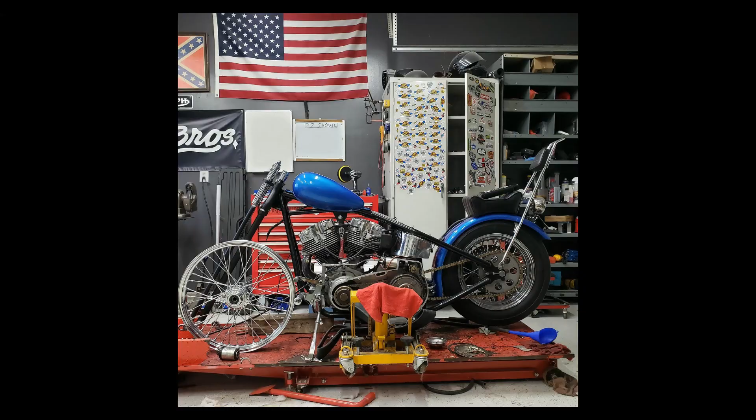Today we're going to go over how to change the oil in 39mm fork tubes. But we're also going to change these tubes out to 4" over, since this is going to go on our Sportster project. So what we're going to do is a combination. I have a tech manual, it's sitting over there under some stuff, but this TC Brothers 4" over kit also comes with instructions. So let's go through their instructions and we'll see how that works out.

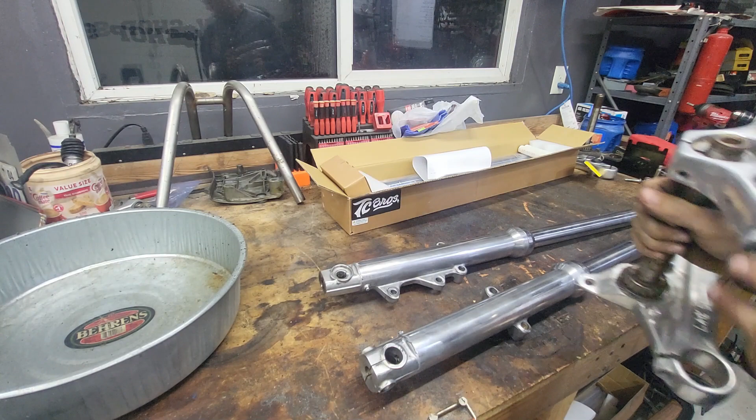Let's see, this is your triple tree. This is where your forks go. The way you get your forks out is you loosen these two clamps right here and they pull out the bottom. Now a lot of this stuff you can do with your triple tree in place on the bike, but given the condition of what we're working with, everything had to come off of the frame so we could make magic happen. Okay, so let's see what these instructions say.

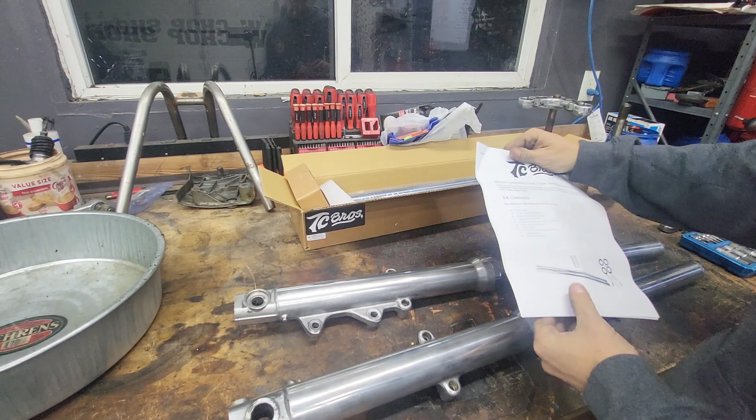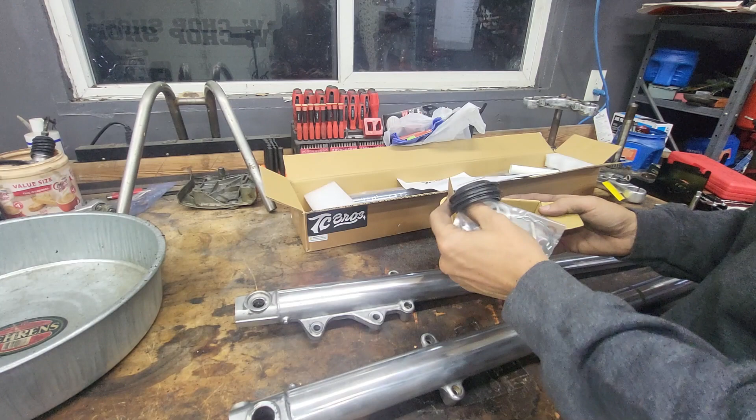Kit contents: 2 fork legs, check. Spacers, check. And seals, rod seals, seals, and seals. Checkity, check, check. Okay.

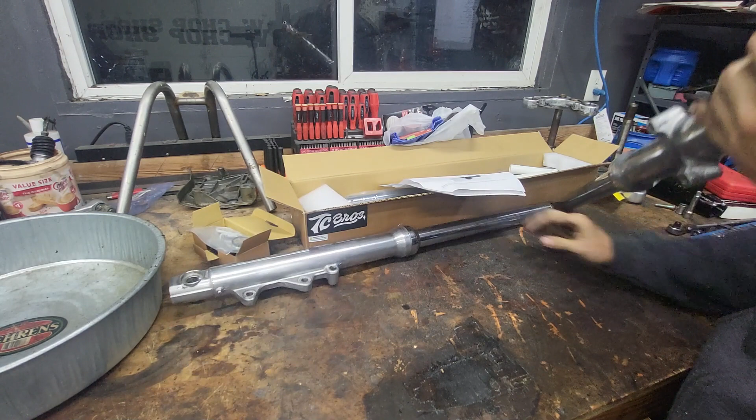Step 1, use an extended 6mm hex bit to loosen the damper bolts. If the damper bolts just rotate, use an impact tool. Okay, so those bolts that they're talking about are right there. And that's a 6mm. I don't think I have an extended one. I have a 1/4" one. Let me get an extension. Let's see if this will fit. Yeah, it fit right in there. All right.

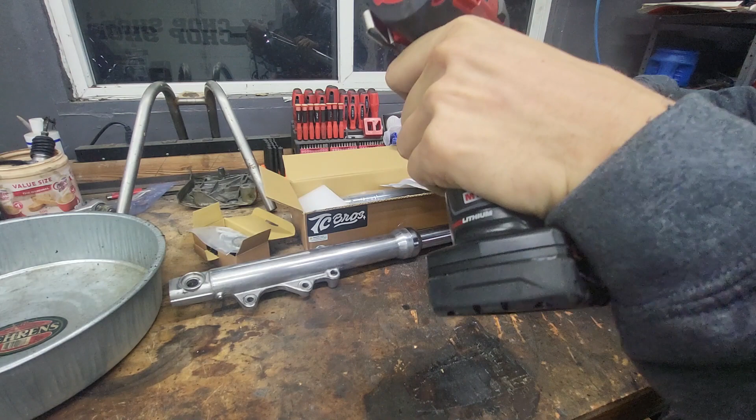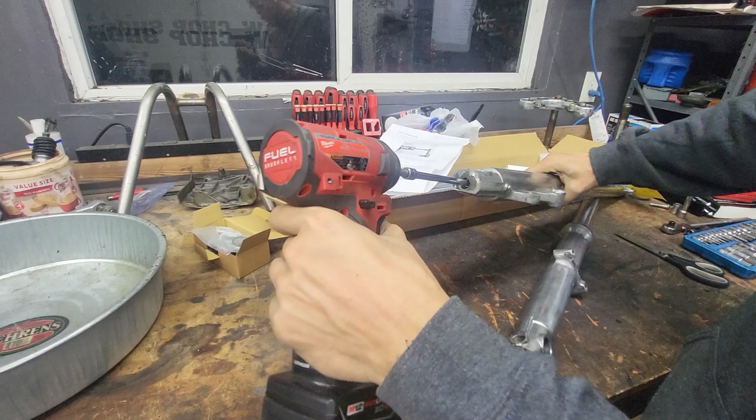And it said an impact will usually loosen them up. So, impact. Yep, that loosened right up. Does it say remove or loosen? Loosen. Okay. So those are loosened.

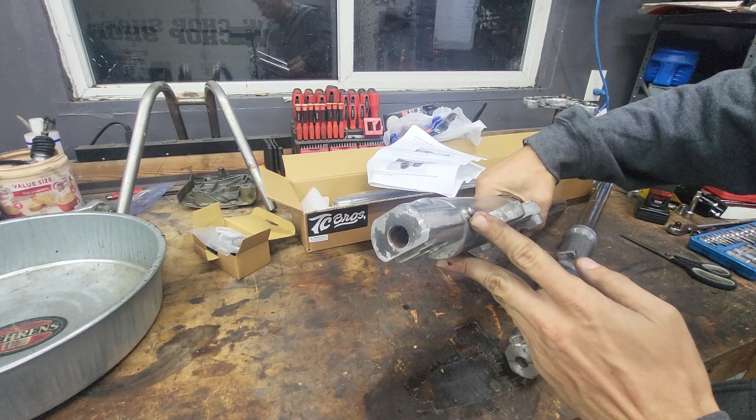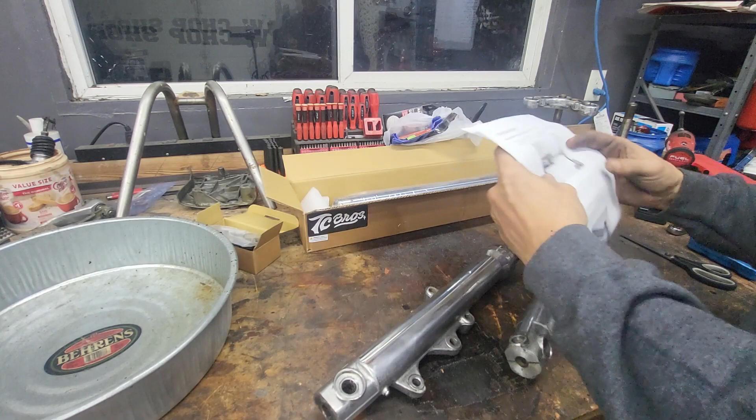Don't disturb the drain screws. All right, so this is kind of common. These little tiny screws on the side are your drain screws if you were going to do a fork fluid change in place, right? So when we pull the damper screw out, we're going to be able to flush the fluid out. Also, have a pan ready for that. But if these don't leak, just leave them alone. They're hell to get in, get out, and have stop leaking. They do include new drain seals if yours are leaking.

Let's see, loosen the fork caps. 35mm socket to loosen the fork caps. Let me get these set up. So here we go, that's your fork cap. That tool I need to grab. All right, so this is a 35mm. The easiest way to do it is a 35mm socket. Also, your fork is extended down, right? So you can lean over this, put some pressure on it. It doesn't pop with a lot of force. This is not like your car's coilover system. Sometimes I need to use my big wrench on this, see if this goes. Yeah, that's working.

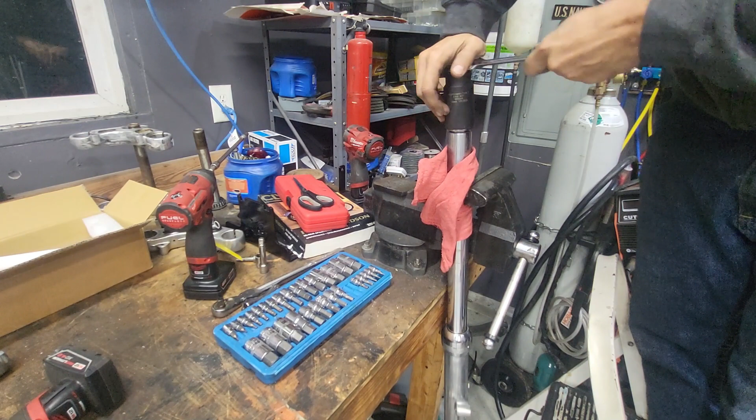Okay, now I like to get on a little step stool just so I can lean over this, and I'm leaking. So throw a pan down here. This is actually way easier to do in the triple tree. But like I said, it's not gonna blow my arm off. It's gonna be a bonk, and then the cap's probably gonna fall. So that's it. There we go. See, that's all.

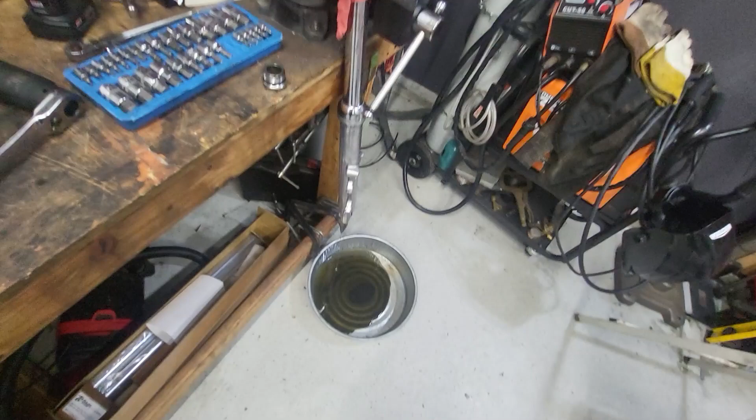Putting them back in sucks. Oh, that is what it is. Yeah, there's where it's leaking a little bit. All right. So we'll let that one drain and we'll get lined up to do the next one.

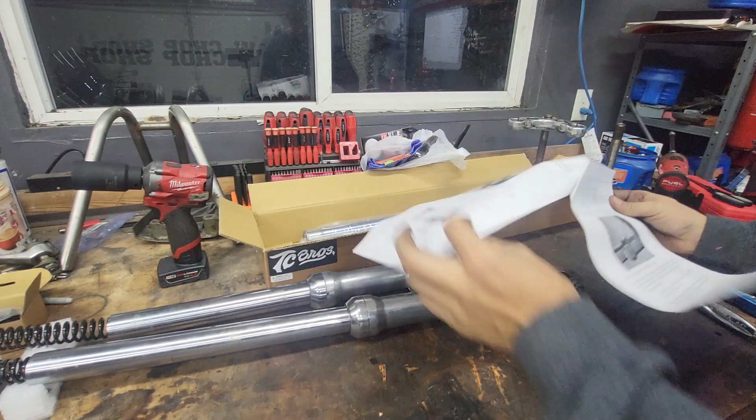Okay, now we got our caps off. So where are we at here? Remove. All right, so loosen fork tubes, caps. I guess we took them all the way off. Whoopsies. Raise the motorcycle, pull your fork tubes out of the triple tree, take your brakes, all that crap off. You gotta have just forks. And then it tells you how to pull your pinch bolts.

Remove your fork caps completely and pull the springs out. Tip: the fork springs may be under compression, even with the suspension unloaded. Use gloves and eye protection during fork cap removal. Exert downward pressure as you unscrew the fork caps to prevent damage or injury. This will also prevent damage to the threads. You've seen what I did. I stood on a little step stool so I could put pressure on these while they were in the vise. If you were on your bike popping these off, you would have them loosened to where they're hand tight in the triple tree. You wouldn't need to stand on a step stool like in the vise.

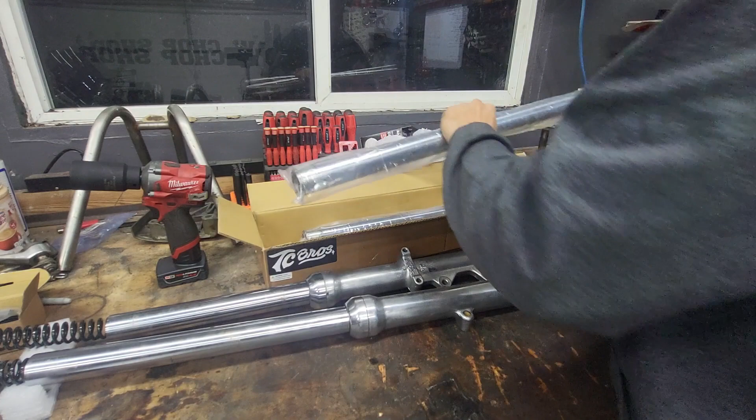Okay, so it wants us to remove the springs. Let me clear this box out so I can stick crap in there. Okay. There's a spring. Ooh, this one's oily. Let's drain that. This one didn't drain like the other one did.

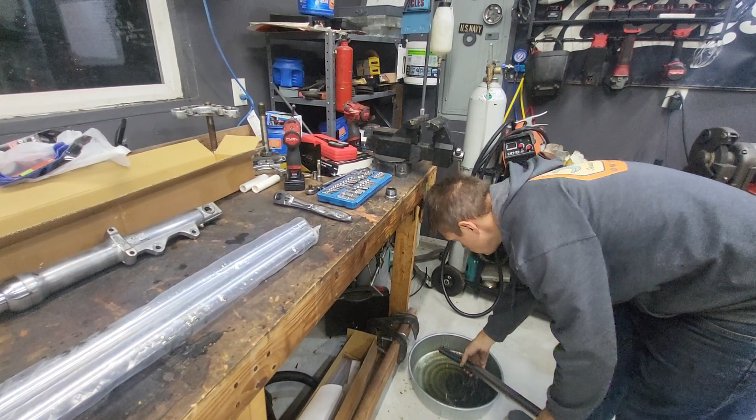All right. And the other spring. And I'm going to take my jacket off, and it looks like this job's going to require some rags.

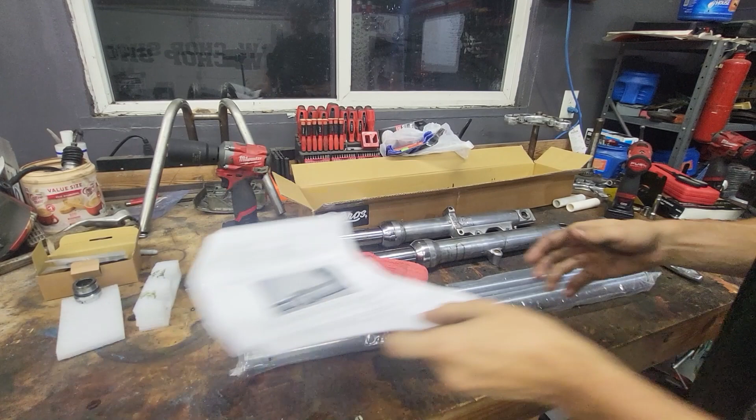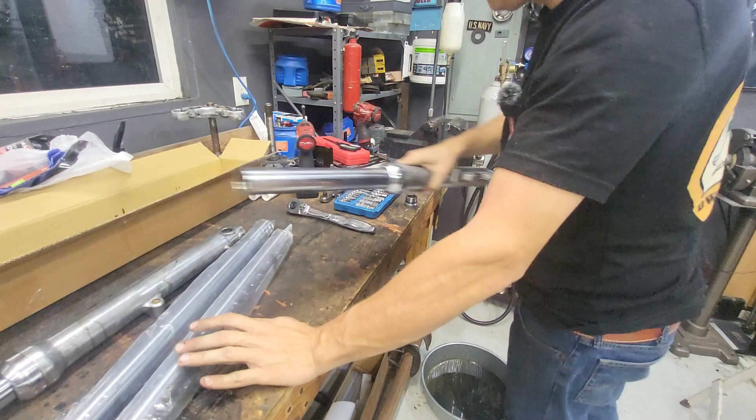Remove fork caps, drain the fork tubes, moving the tubes through their strokes several times. Use a small flathead screwdriver, carefully pry up the dust boots. Okay, so let's keep trying to drain these, I suppose. There we go. Oh, that damper rod must be a little looser than we thought. Okay. We'll slide that in there and just keep it there until this calls to take it out.

Next thing they want us to do, drain the fork tubes and then use a small screwdriver to pop our dust covers off. Easy enough. Oh, if you look, there's a little slot that you can stick a screwdriver in. And they should just pop. Of course, these ones aren't. Lucky for me, I have a hammer. This is being a bitch.

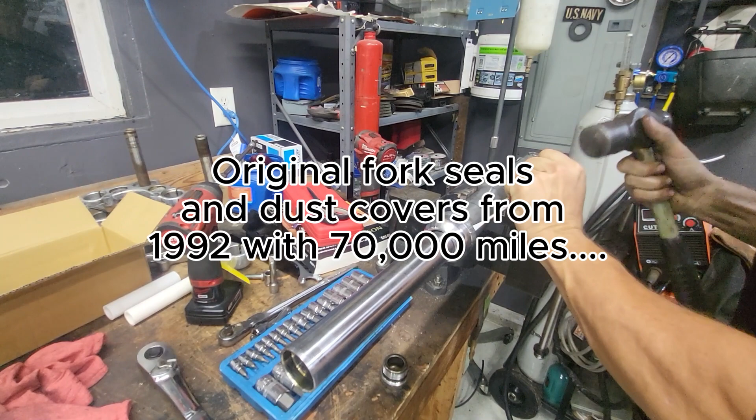Right. Yeah, there we go. That's why it's being a bitch. She's rusty. Okay. So that dust cap is off. Let me get the other one up here.

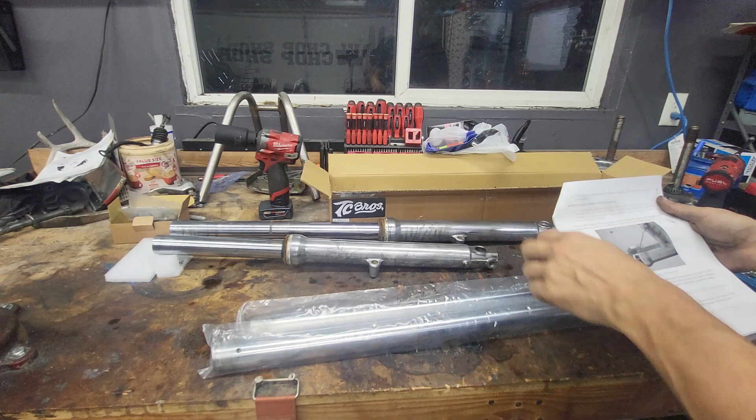Yeah, normally these aren't that hard to get off, but when your seals do that and peel, poses a slight problem. All right, drain fork tubes, did that. Pop the cover off, okay. Free the seal retaining rings from their grooves in the lower leg. And remove the damper rods and rebound springs, remove the fork seals, separate the inner and outer tube.

Okay, there's this damper spring. There's this damper spring. Get that screwed out. Okay. Okay, there's our cover piece. I don't think I'll save that. I think that'll go right in the trash.

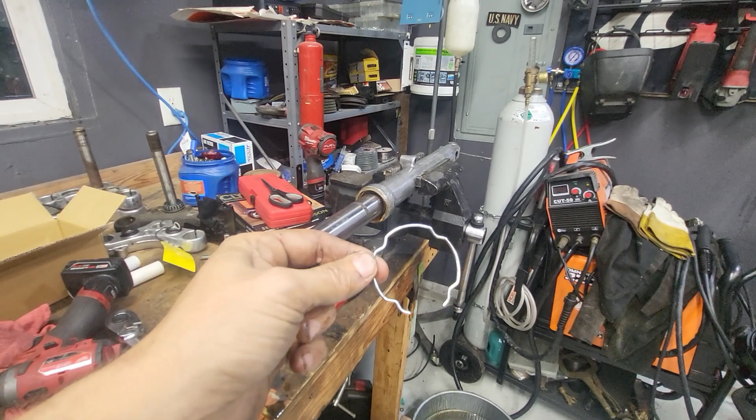And then if we look in here, you can see a retaining ring. Actually, let me show you what it looks like in the new one. There's a retaining ring like this clipped inside here, right? So we just need to pop it out. And we'll use a screwdriver for that, pry up on one side, pliers, whatever we got to do to get that out. And then everything should separate. Should.

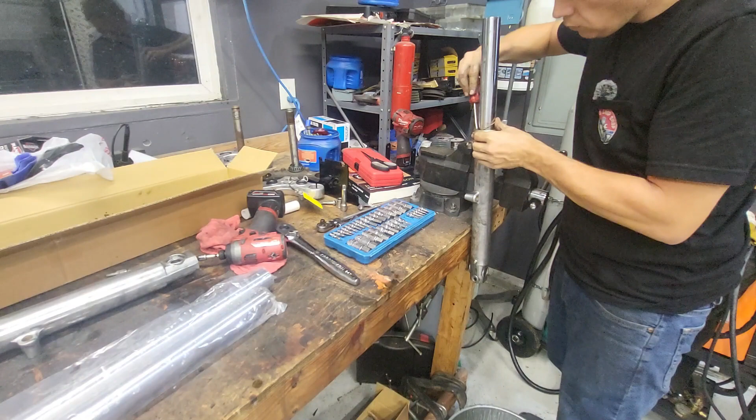Okay, so the way that you kind of pull these out is you essentially use your upper fork tube as like a beating device and just wham, wham, wham a couple of times. My seals are shit, so I'm gonna lube them up, and while that one's soaking, I'm gonna try to pop the other dust cover off of this one, and then we'll get it soaking too.

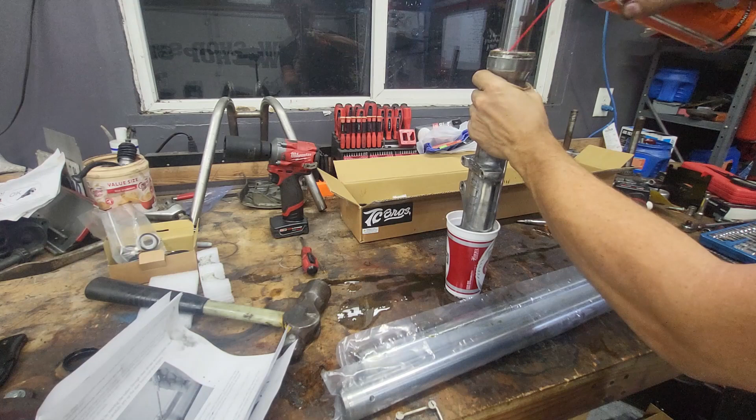Oh, this one's going. All right. There we go. Let me try that with this other one. There she goes. Perfect. Okay, what is next?

Make sure to account for both damper rod bases. Make sure they're not still in there. Ah, they are. Well, at least this one is. One damper rod base. Two damper rod bases. There we go. Okay.

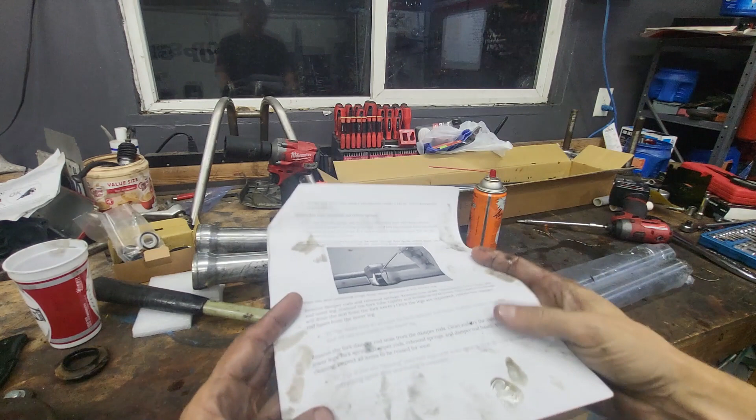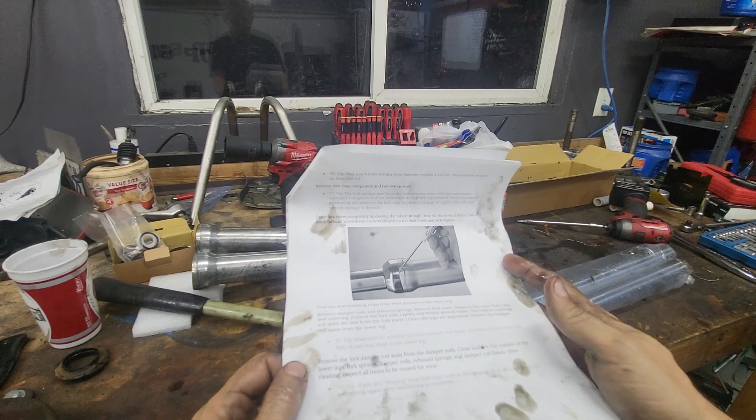Remove the fork damper rod seals from the damper rods. Clean and dry the insides of the lower fork legs and springs, damper rods, rebound springs, damper rod bases, and after cleaning inspect them for wear. Okay. So we'll take a look at the damper rods.

Okay, so these are your dampers, right? They have kind of like your rebound springs in here. Your rod seals are these plastic chunks, so we can set that spring off to the side. These plastic chunks pull out pretty easy, and then they put in the same way. Easy stuff.

And, you know, I like to offset your ring gaps there. So that one's done. Set this spring off to the side. And 180 outer seal. Okay. Okay. Tip: if you're shaving your fork legs, now is the time to do it. I'll be back in a minute.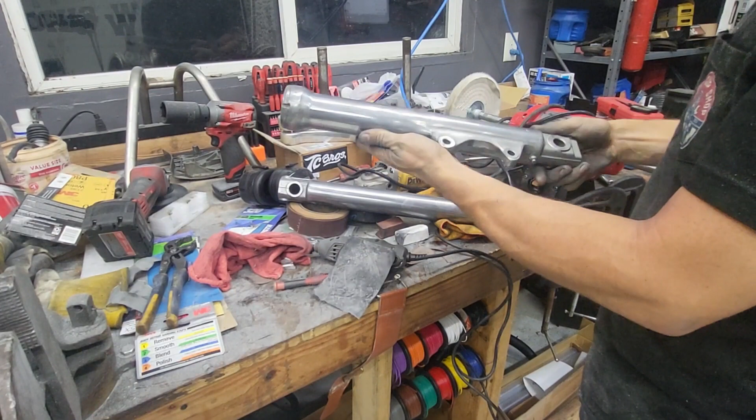All right, so this is real quick after I've shaved these, fingerprints, but I ran them on the polisher. My hands are greasy as hell. But I ran them on the polisher and everything's coming out all right. They're pretty smooth. So I just wanted to show you guys it is possible to do this without a lathe. Just go slow, take your time. Fingerprints again.

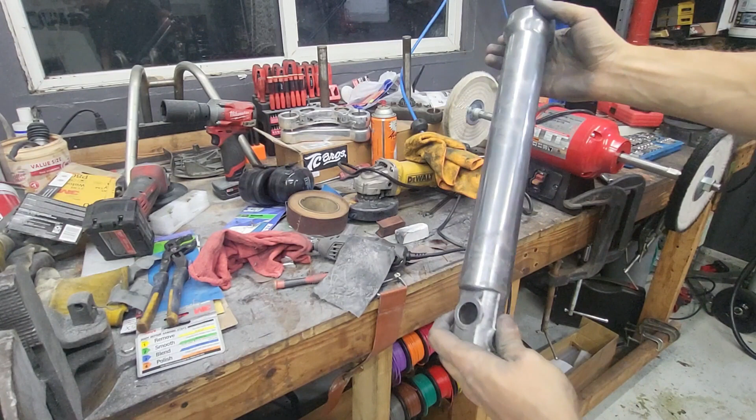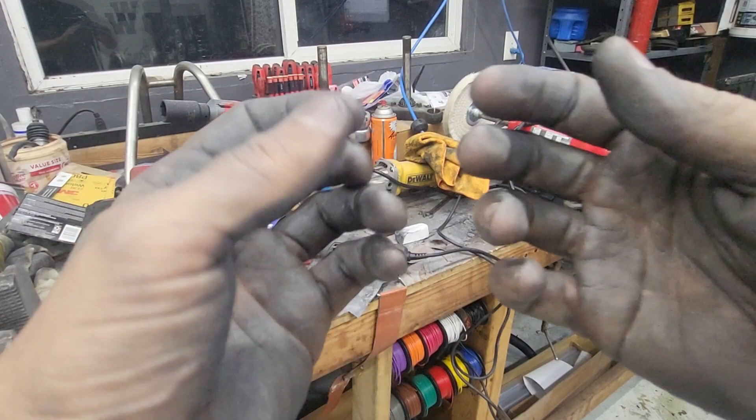Go slow, take your time, and they'll come out all right. So once I have nice clean hands, I will hit these on the polishing wheel once they're all back together. And things are gonna look pretty good, so yeah. It took me 2 hours probably to get those that way. So anyways, let me clean all this shit up and we'll get back to assembling the forks and putting the longer tubes in.

All right, and we are back. I got the workbench cleaned up a little bit and let's keep on moving. If you're shaving your fork legs, now is the time to do it. Be sure to clean everything again after machining is complete. Ta-da! Got the fork legs done, and I did it by hand. They do need polished a little more, but we can put the forks together. I can polish them up. That's no big deal.

All right. So, fork assembly. Transfer fork bushings, the lower bushing on the fork when it's upright, is these two pieces right here, to the new fork tubes. Replace them if they're worn. Use a small screwdriver to gently pry the bushings and the ends apart, enough to free them from the retaining groove, and then we'll stick them on the new ones.

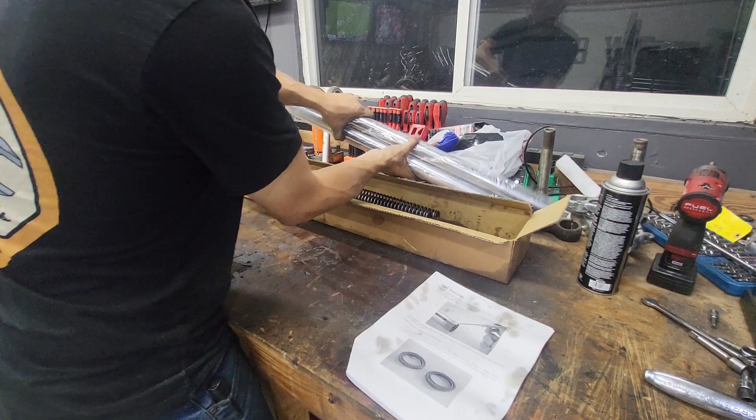So, let's get our new forks. And all we're gonna take off is this metal stuff here. Right, so we need a little screwdriver, rags. And the reason I want some rags is trying to keep everything clean. And this workbench is very dirty.

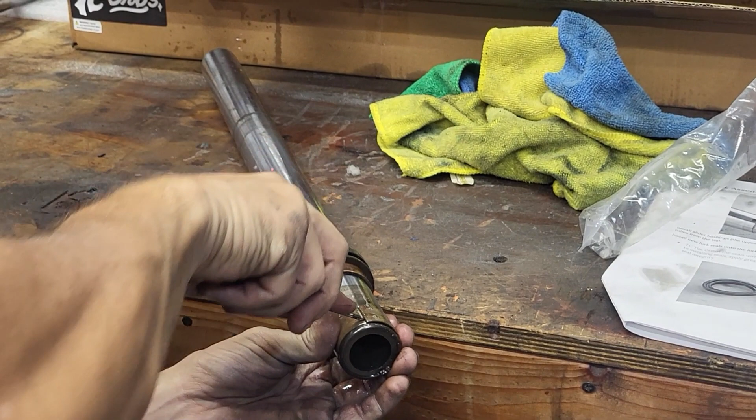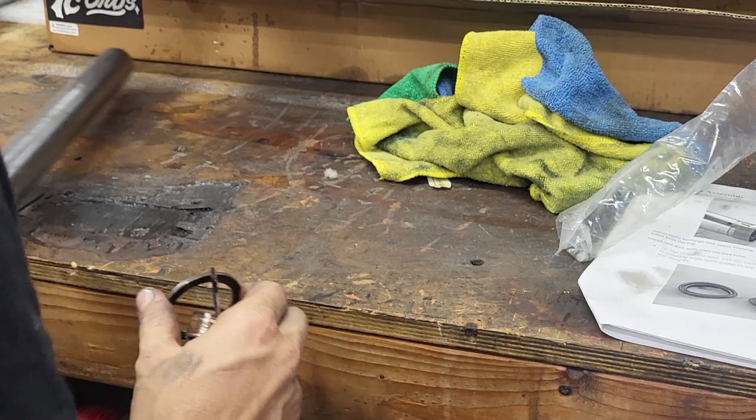Okay, so I'm going to set that piece on a rag, and then this one slides off, and this slides off. Okay, so we slide that on, and we slide that on. Then we slide that on. And then we do it again.

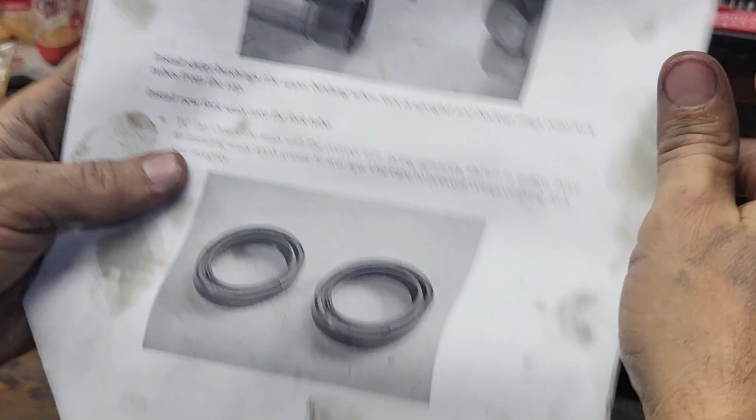Okay, so install the slider bushing, the upper bushing when the fork is upright, and backup rings onto the fork tubes. Okay, install the new seals onto the fork tubes. Orient the seals with the correct side facing upwards, shown in the image. Prior to installing the seals, apply grease to the lips. Use care to prevent compromising fork seal integrity. Okay.

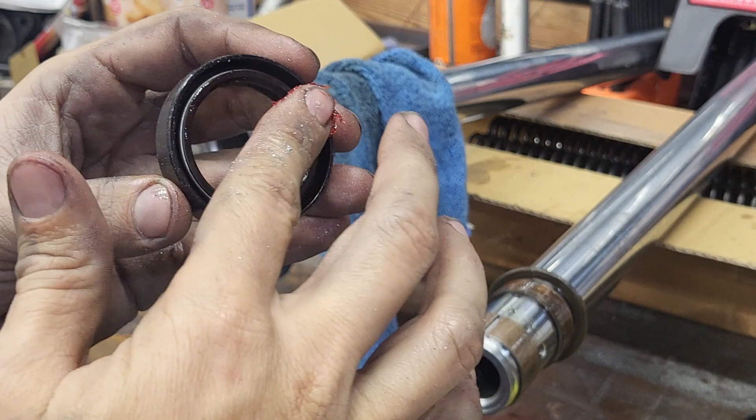Let me grab grease. All right. So, it didn't really tell me what grease to use, so I just got some red grease. Kind of general purpose roller bearing grease. And I'm not going to go ham with it, but okay. Set that off to the side, and we'll do the other one. Set that off to the side. Okay, so there we are greased. Our bushings are on.

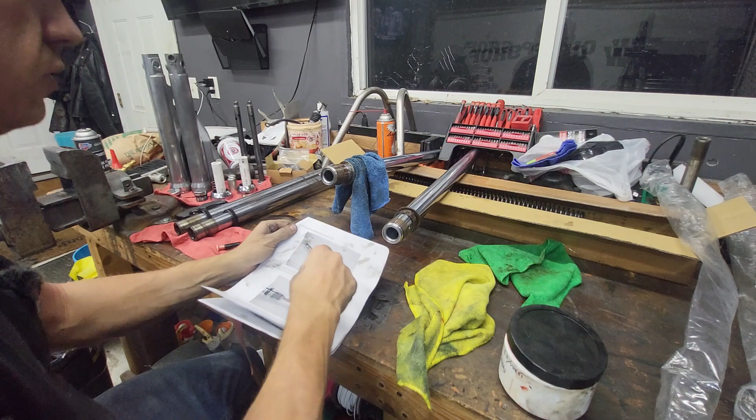All right, so what's next? Install new seals on the damper rods. We did that. There's our damper rods. And there's the bottom pieces. And here's the screws. Okay, now what? Install the rebound spring into the damper assembly into the fork tubes. Return the damper rod bases to the lower legs.

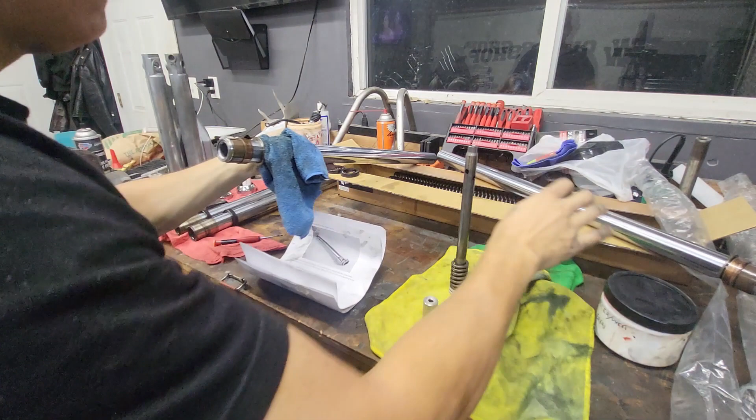Okay, so it seems like these lower legs are just going to drop into our fork tubes. All right, and these damper rods are going to get their springs put on them, like so. And they're going to get sent home through the tube. Okay. You stay. Okay.

Slide each tube into its corresponding lower. Install the new damper rod bolts. Oh, shit, we're putting these back together. Ugh. Okay, so we're going to take a lower. We're going to drop this in, and it doesn't have much of a choice but to line up. Yeah, there's kind of like a little groove in here if you look, and it falls right into that groove. And then we knock everything over.

Gonna look through here, looks like it's lined up pretty good. And shoot, this came with new bolts and crush rings, so we're gonna use the new ones. Okay, not throwing that in super tight just yet. Put the crush ring on this one. Send this thing home. Yep. All right.

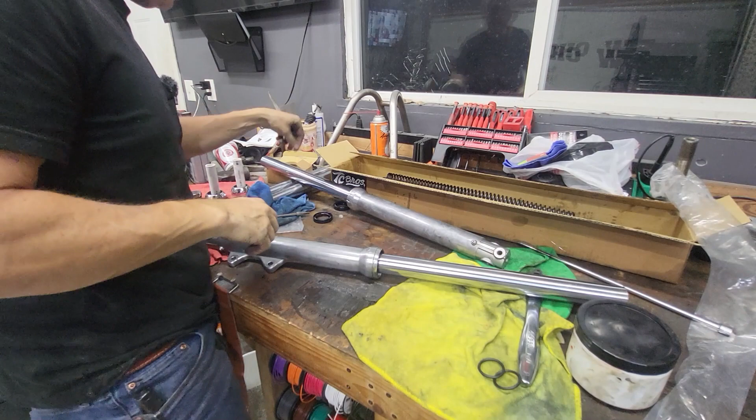Next, we're going to wipe the dust off of these seals. Give me just a second. Okay, so I had to clean the seals up. When something rolled over here, they fell. And they fell right into grinding dust. So that sucks. Okay.

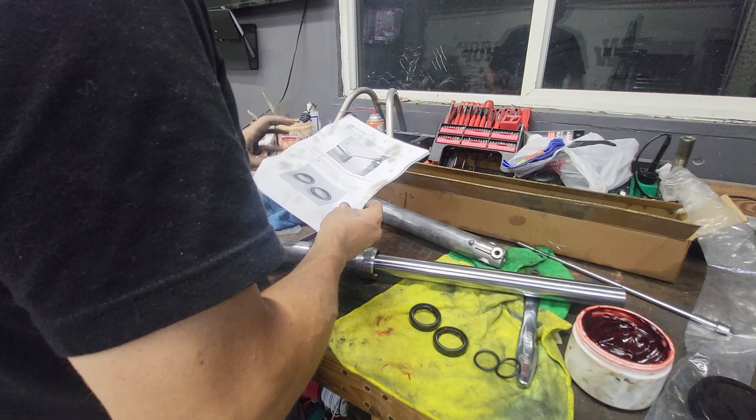Install the new fork seals. Orient the seals with the correct side facing upward, which is this way. Don't hurt your seals. Let's see, install the new seal rings onto the damper rods. Oh well.

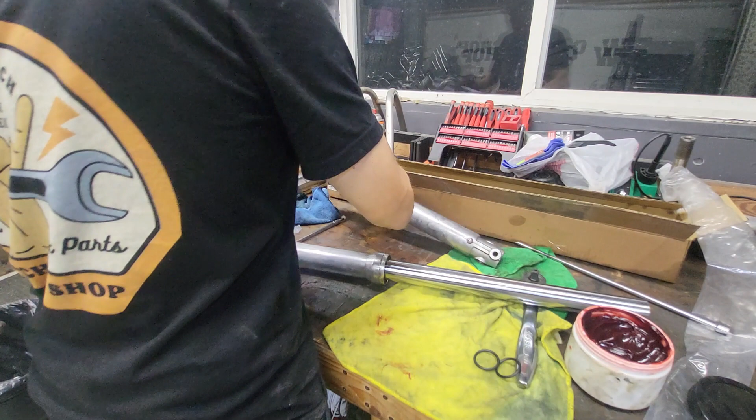Okay, at least these go in kind of easy. So now we need to do something to get those forks down enough that I can get that retaining ring in. If you have a piece of pipe, like an inch and some change, that just sort of fits around this and slides down on those, perfect, use that. Fork seal beater thing that I got off of the internet 100 years ago. It works. All right, you sort of see what we're doing here.

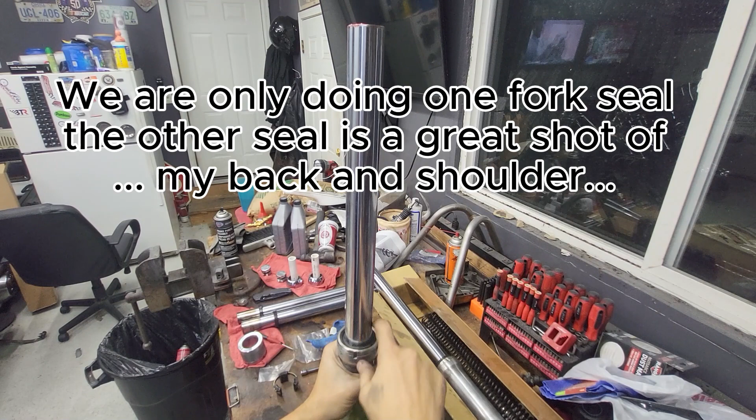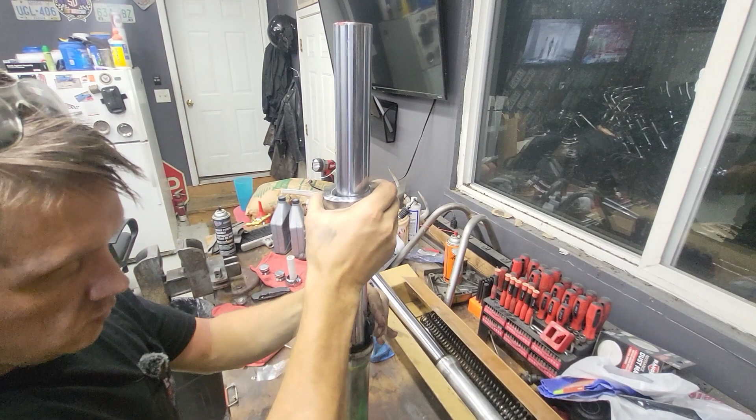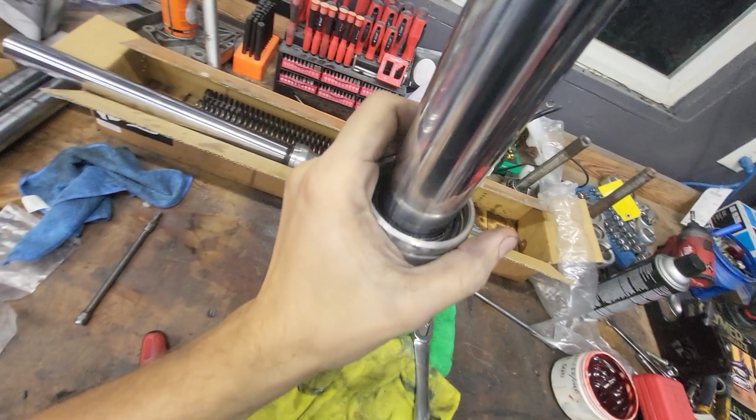We need to get this ring down, right? So I take this piece, slides over the top, and then I take this hammer piece, slides over the top, and I beat that down. You go until you can see where your retaining ring fits in. Okay. Let me see. You guys see in there? You can kind of see right there where our retaining ring's gonna set.

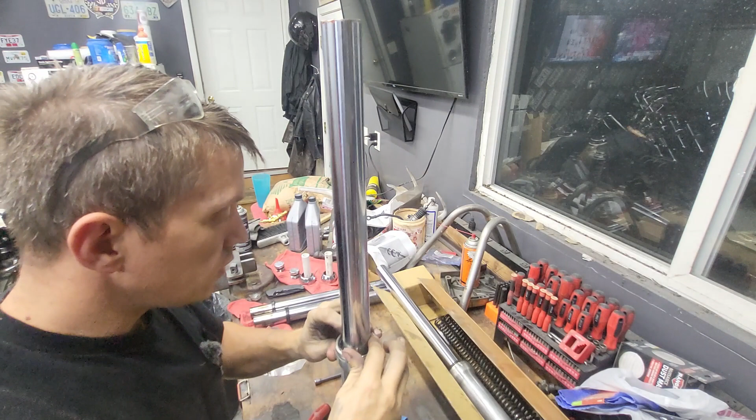Okay. So then we take our retaining ring, clean all the damn dust off of it from shaving these legs. You really want to keep this stuff clean. All right. And then we stick one corner in and then just kind of push. Oops. Oops. There we go. And it clips in, and that's our retaining ring.

Now we will get our dust cover out, wipe it off. And we will slide it over, and this just presses into place. Now is the time where we would also put our caps back on here if I was going that route, but if you see this, I'm going a different route. We're gonna do something else. Well, I'll probably just order new ones, but yeah. Okay.

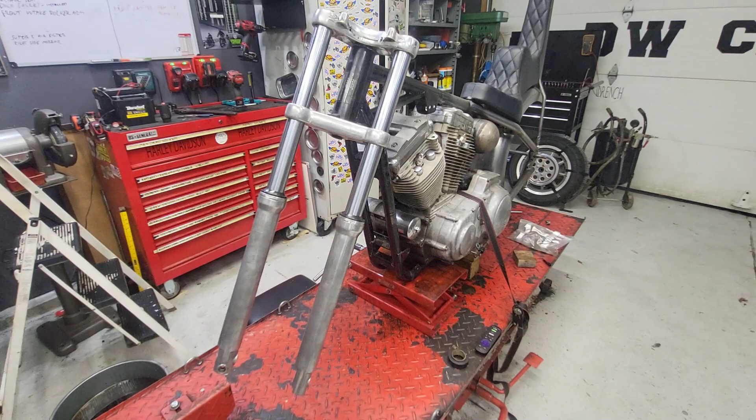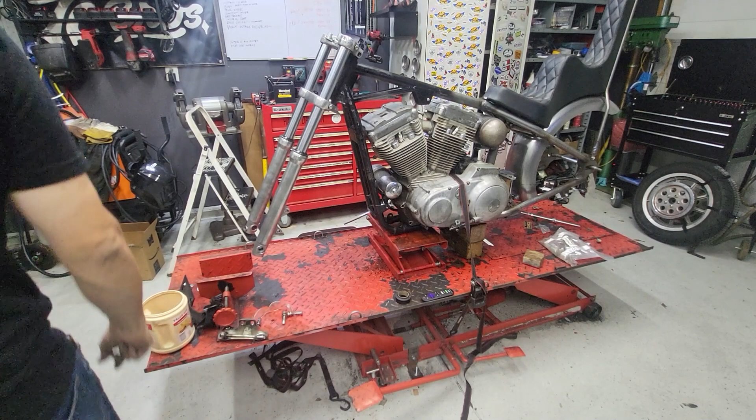Now it says put the fork tubes in the triple trees. Yeah, I suppose I could do that. Give me a second. All right, so that's what that's gonna look like with the 4 over front forks on it. That's not too bad. There's no bearings in the neck right now, so it's just kind of grindy, but I'm feeling that. All right, what's next? Fluid? Springs? Install the fork tubes into the triple trees. Be sure it's positioned slightly above the tree, which they do.

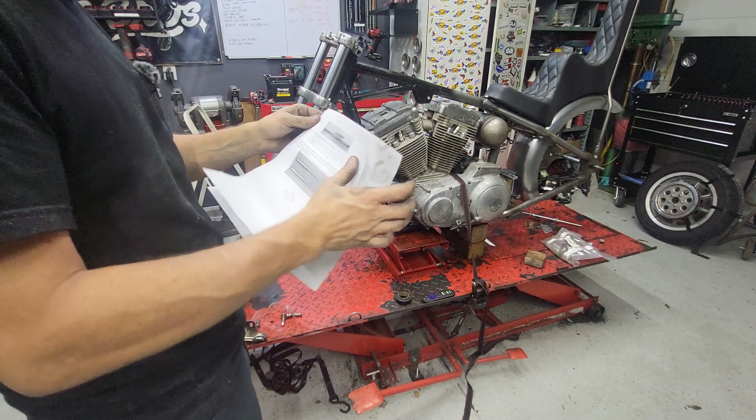Measure the correct quantity of fluid and pour it in. And then they give us a chart right here. Also, these longer forks don't change your fluid type. It doesn't even change how much fluid you put in. Okay, so I have a 92 to 98. This is an XL883, whatever. So we're gonna put 12.1 ounces in.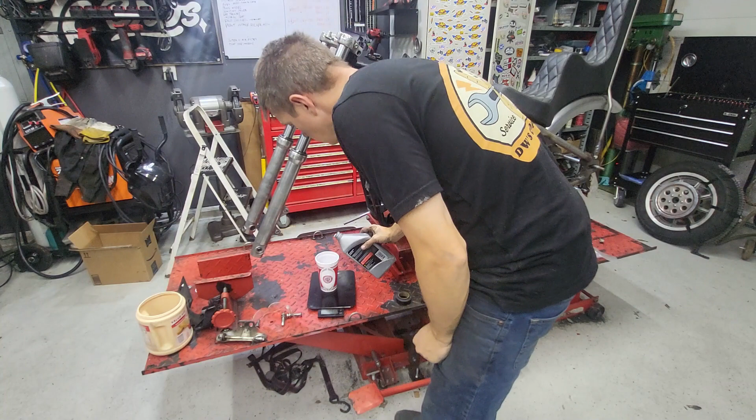Okay, so I have this. We're going to run it to fluid ounces. I'm gonna grab one of my shop cups, put it on here. Zero it out. There we go, zeroed out. And we're gonna put 12 ounces of fork oil, just run-of-the-mill fork oil, in that cup. And then we'll grab a funnel, pour it in the top. Six, 10, 11, 12.2. Yeah, I'm gonna say that's all right.

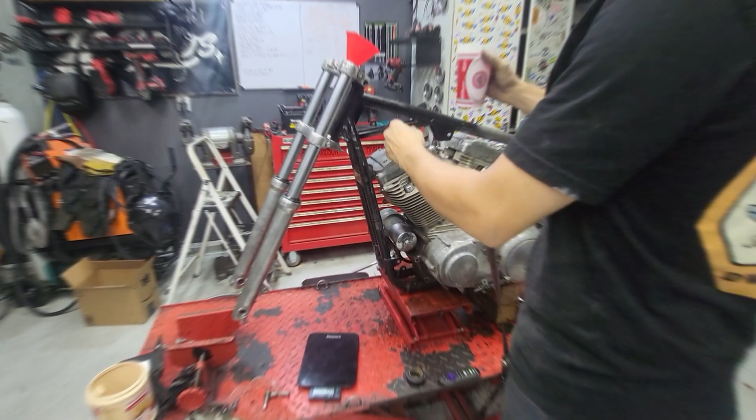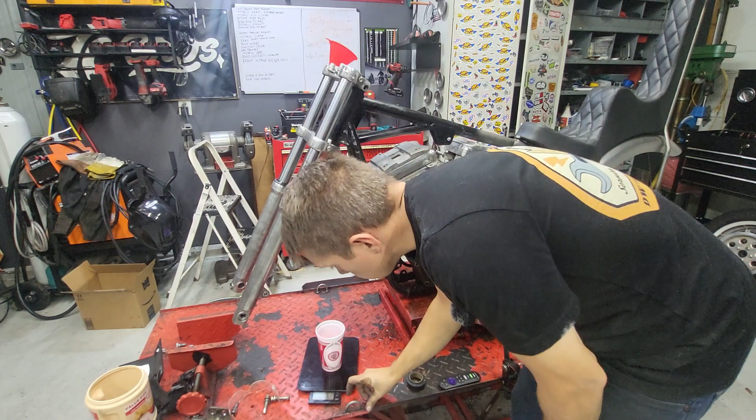Oh, also don't forget to tighten your damper bolts at the bottom so your fluid doesn't just pour out. Toss this back on, zero it out, and we'll do another 12 ounces. 1, 2, 3, 4, 9, 10, 11, 12.2. So we're wrong, we're 0.1 over, but we're 0.1 over on both. So if you're gonna fuck it up, fuck it up even.

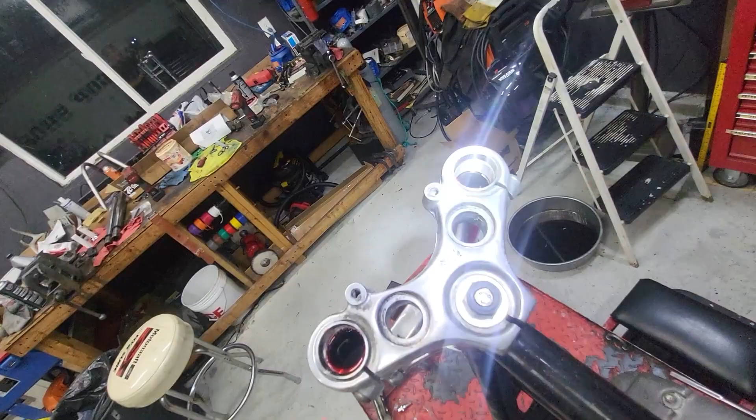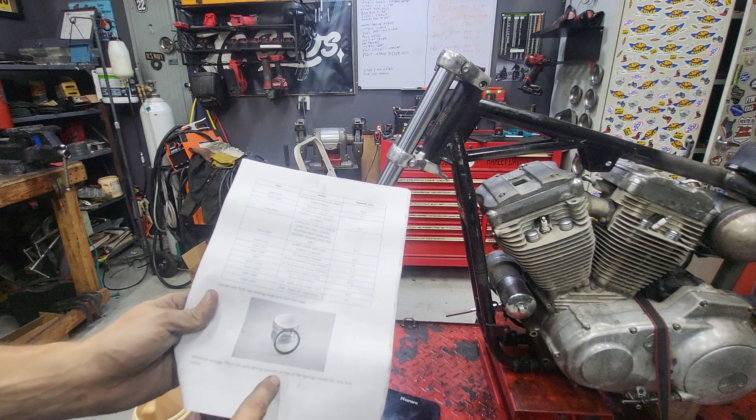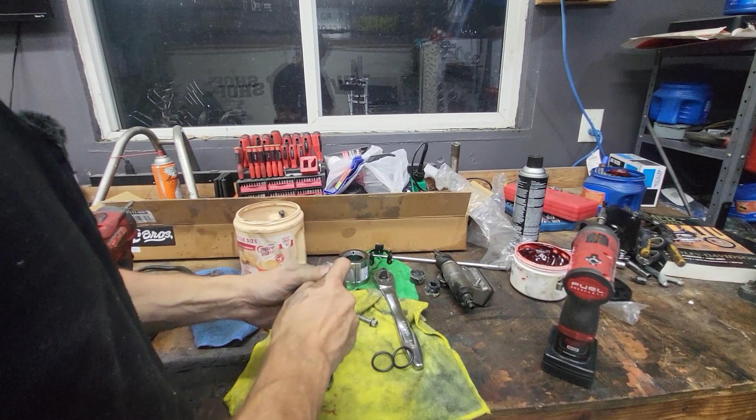Well, that's kind of cool. So if you look on top, this stuff is just slowly seeping into wherever it needs to get to. So we'll give that a minute. So we're going to reinstall the spring, and then we're going to change the gasket out on our lids right here. We could do this while we wait for the fluid to seep down. Okay, that went quick. So let's drop a spring in this far side.

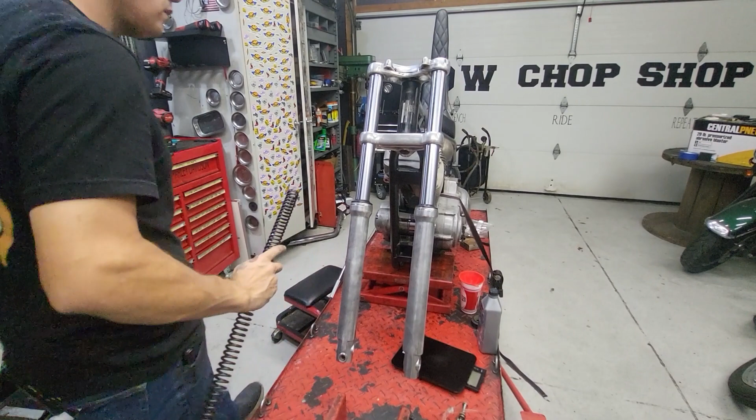All right, so this is the fun part. Since we're using longer tubes, we're going to put in spacers. And then put our cap on top of those. So this should be fun. Make sure we're strapped down pretty good. Yep. Now I'm going to stand on my table, and I don't recommend you standing on your table.

If you look, my table's fastened to the concrete. It's not coming out. And if it does, then this video will probably go viral, and hopefully that'll pay for my medical bills.

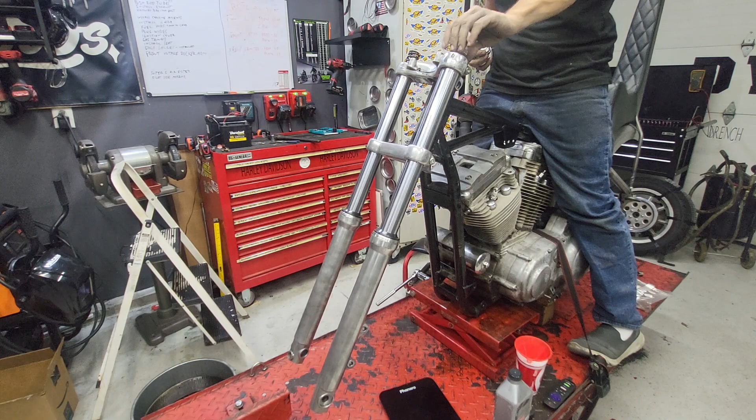And I'm going to put this cap in just to prevent oil from coming out. There we go. It'll extend that front fork down. Torque those to spec. Keep your hand over this thing. Always keep some sort of pressure on it till you're sure that it's started. And you notice I didn't wrap the shit out of those.

All right, guys, so there's the front forks on. So that's done. I'm gonna be taking these in and out, mocking stuff up. There's still a lot of crap to do to this bike before we even think about calling it ready for paint. I'm gonna order the rest of the stuff for the front end probably right now, actually. So yeah, hope this helps somebody.